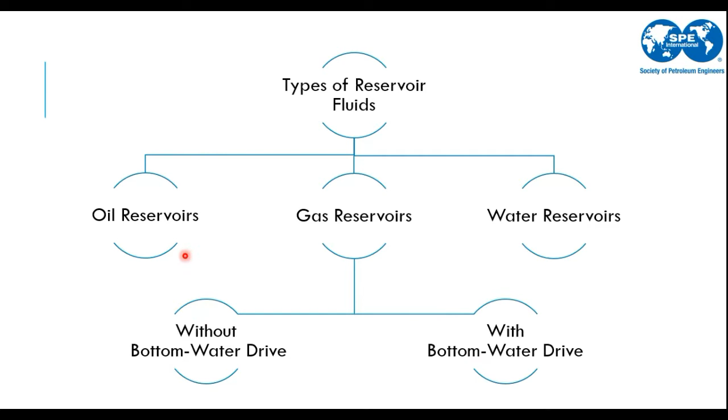The last thing that we will talk closely about is the oil reservoirs. The oil reservoirs are divided into two main categories: undersaturated and saturated oil reservoirs. The main difference is that undersaturated reservoirs are where the reservoir pressure is greater than the bubble point pressure. So you don't have any free gas in this formation. You only have gas dissolved in solution, and there are two types: with bottom water drive and without bottom water drive.

The second category is the saturated oil reservoirs, where the pressure is less than or equal to the bubble point pressure. So we will see some free gas, but if the free gas isn't enough to form a gas cap, this is called solution gas drive or depletion reservoirs. If the free gas is high enough to cause a gas cap, this is a gas cap drive reservoir.

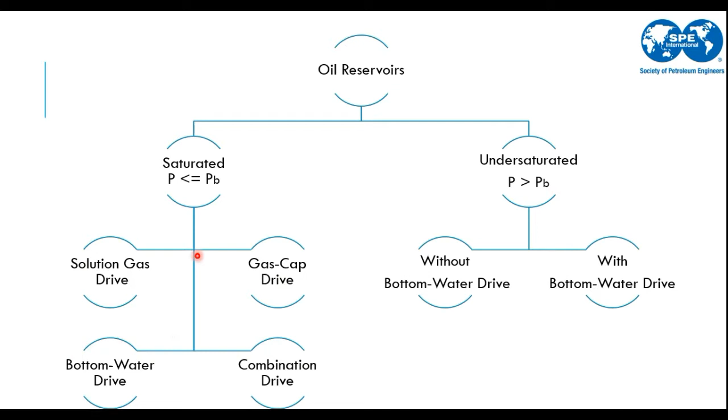If we have bottom water drive reservoirs, we will see some free gas, but the main driving mechanism here is the bottom water drive. And the combination drive reservoirs are where you find all of these things together: the free gas, the bottom water, everything about the saturated oil reservoirs.

So, there are three main methods to calculate the original hydrocarbon in place. HIIP is the abbreviation for hydrocarbon initially in place. We have the volumetric method, which we will talk about briefly. We have the material balance equation, which is our main concern during this webinar. And the last is decline curve analysis, but we won't talk about it very much.

The volumetric method: in order to calculate the hydrocarbon initially in place, you should have an isopach map where you know the area, and you know the thickness or the net thickness of the formations that you have, in order to calculate the hydrocarbon initially in place by using the volumetric method. This method is probably used by geologists or geophysicists in order to calculate this hydrocarbon in place. We have two equations here.

The first one is N equal 7758 multiply H, where H is the net thickness, as we said. A is the area of the reservoir in acres. Phi is the porosity; actually, it is the average porosity for all the reservoir. Multiply 1 minus the initial saturation, divided by Boi. It is the initial oil formation volume factor when we start producing from the reservoir, or before production.

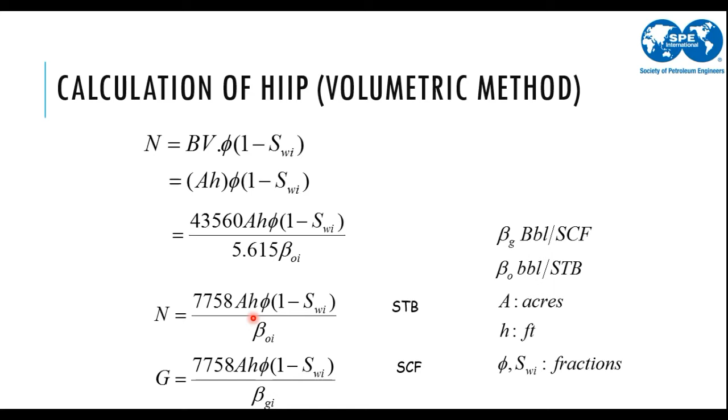the material balance equation is nearly the most accurate method to calculate the initial hydrocarbon in place. But why is that? Actually, because the material balance equation depends on the actual data or the production history that you have. It depends on the produced oil during the production of the well. It depends on the oil formation volume factor, gas formation volume factor, the Rs, the initial Rs, the Rp. All of these things are calculated in order to give you the most accurate approximation for the hydrocarbon initially in place.

Talking about the saturated reservoirs, I have given you the general formula for the combination reservoirs that we were talking about. The reason why I gave you the general formula of the combination only is that if you understand it very well, you would be able to calculate the depletion reservoirs, the gas cap reservoirs, the water drive mechanism reservoirs. All of these things could be manually calculated by using this general formula, and I will teach you how later on.

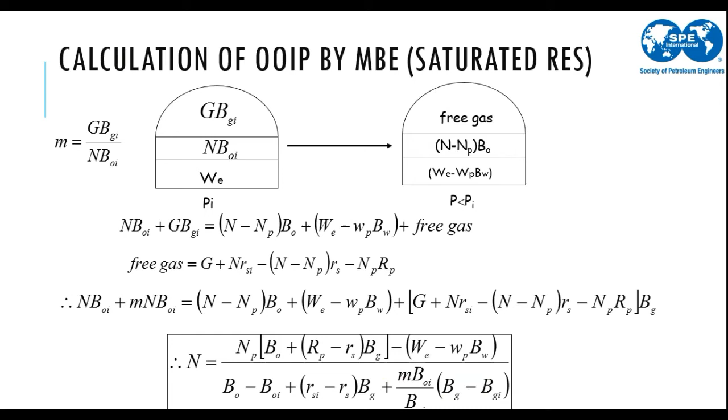Talking about the general combination equation for the saturated reservoir, all of these equations seem very confusing actually. This is the same equation, but we rearranged it in order to have a straight line equation. All of this term, NP beta O plus RP minus RS beta G plus WP beta W, we could substitute by F. Call this term F. Okay?

F is an abbreviation for flowing. So let the N, or the initial oil in place, remain as it is. We took the N as a common factor, okay? And this term we renamed EO, or the expansion of oil, and this term we would rename as EG. EG is the expansion of gas.

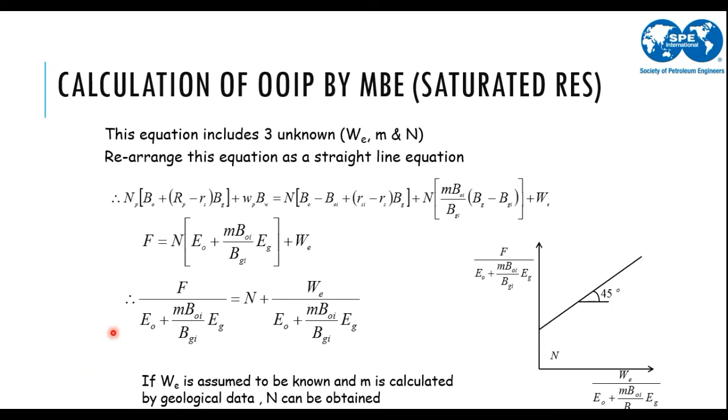So this is the saturated reservoirs. Talking about the undersaturated reservoirs, it is the same concept, but there is a little difference, because when the reservoir is undersaturated, or the reservoir pressure is greater than the bubble point pressure, we would take into account the CW and the CF. CW is the water compressibility, and CF is the formation compressibility.

Actually, there is another term called CO. CO is the oil compressibility, where it is equal to beta O minus beta OI over beta OI, or the initial oil formation volume factor, multiplied by delta P. And you should pay attention to this information.

In the CO equation, delta P is the current pressure minus PI, the initial pressure. Again, in the oil compressibility equation, delta P is the current pressure P minus P initial. But in the N equation here, delta P is P initial minus P, the current pressure. You know the difference? In CO, it is P minus P initial. In the N equation, or the original oil in place equation, it is PI, the initial pressure, minus P. Okay?

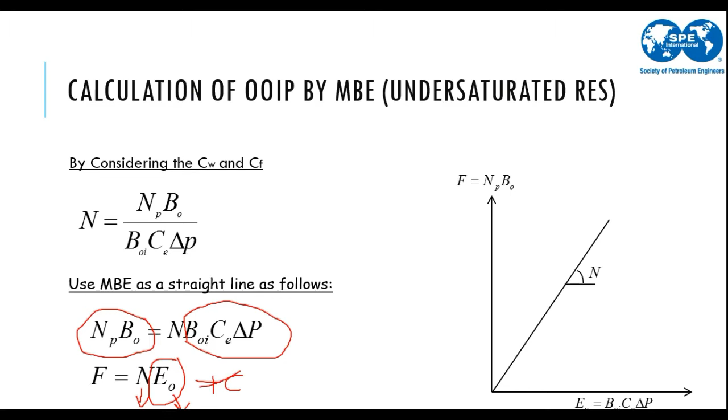Okay, welcome back again, and the first thing I would like to say is that I'm sorry for the mistakes that I made in the first presentation. The second thing is that this is where you will learn how to use the MBal software. MBal is a very user-friendly software that enables you to deal with very simple panels. You don't even need an instructor to teach you how to do it.

But anyway, if you open MBal software, you would have the tool panel with different options like material balance, reservoir allocation, Monte Carlo, decline curve analysis, and so on. We will talk about each one of them separately. The material balance tool is the main concern, where you would calculate the initial gas in place or the initial oil in place and predict the future performance if you want to do gas injection or water injection, and so on.

The reservoir allocation tool is a tool which improves the allocation by allowing the user to enter IPRs for each layer and calculate the allocations by taking the rate of depletion into account as well. Crossflow is also accounted for in this model, as well as different start or finish times for the well. Impurities are also tracked and can provide an effective measure of the quality of the underlying assumptions. This is in the case where few data are available.

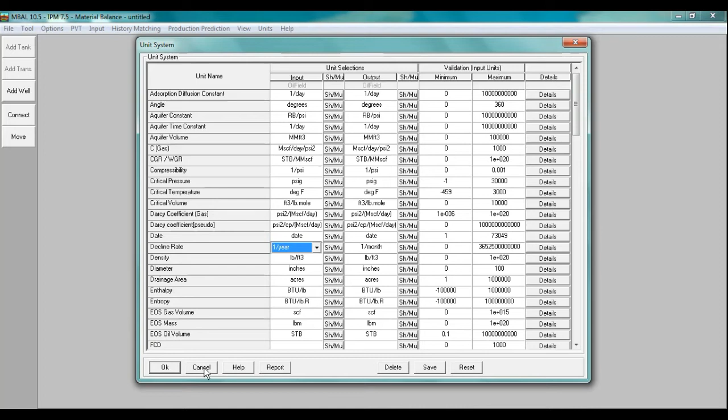Okay, as we said, MBal is a very friendly software. We could follow a sequence from left to right and from top to bottom in order to get what we want. The first thing that we will press is the options panel. It will get you the user information like the company, the fields, the location, and the platform if you are working on a platform, and the analyst with the reference time. Don't worry about it.

If you want to have any comments, like if you write SPE for example and you want to have a date stamp, you click here. It will give you the time and the date that SPE was written. Okay, it's very simple, and I guess for now it's useless.

Anyway, for the reservoir fluid we have 4 kinds of reservoir fluids: the oil reservoirs, the gas reservoirs. Actually, the gas reservoirs is named for the dry gas reservoirs. For the retrograde condensate reservoirs, MBal uses the retrograde condensate black oil model. These models take into account liquid dropout in the reservoir at different pressures and temperatures. So there is a difference between the gas and the retrograde condensate. So what is the general reservoir fluid?

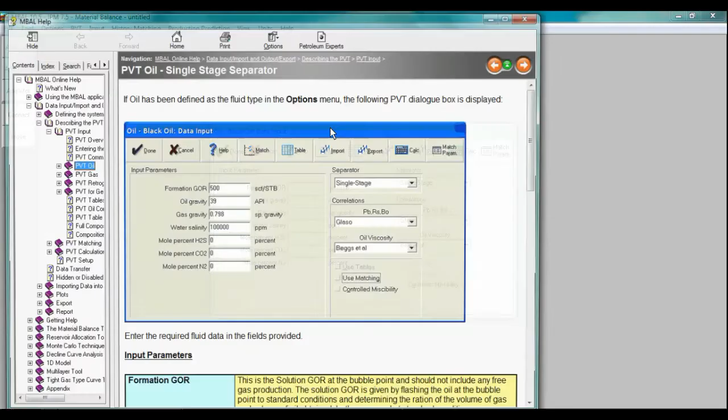For example, the formation gas oil ratio, if you read it on your own, you would think that it is the gas oil ratio that we know. Actually, it's not. It is the solution gas oil ratio, or the RS, at the bubble point pressure. It won't include any free gas production. The formation gas oil ratio here is the RS at the bubble point pressure. For example, let's enter the formation gas oil ratio as 500. This is an example actually.

The oil gravity, let's enter it as 39 API. I know it's a huge number, but it's okay. It's within the range. And the oil gravity here is at standard conditions. How did I know that? From the help button, as we said, the oil gravity is the gravity of the condensate at standard conditions. The gas gravity, let's enter it as specific gravity 0.798. The water salinity, let's say it's 100,000 ppm, parts per million. And let's assume that there is no H2S, no CO2, no N2.

After inputting the parameters, we want to match the data that we have from the production facility with the data obtained from the PVT laboratories. How could we match both of them? We have the match button here. Please click on it. It will give you maybe 20 or less tables for the PVT data obtained from the laboratory.

Let's say that the temperature of the reservoir is 200 degrees Fahrenheit, and the bubble point pressure is 2200 psig. Let's enter the pressure as we said, 2200 psig. The gas oil ratio here is again the RS, the solution gas oil ratio. Let's enter it as 500. Oil formation volume factor 1.32. Oil viscosity is 0.4. Of course, if you have all the data from the PVT laboratories, you would enter it here.

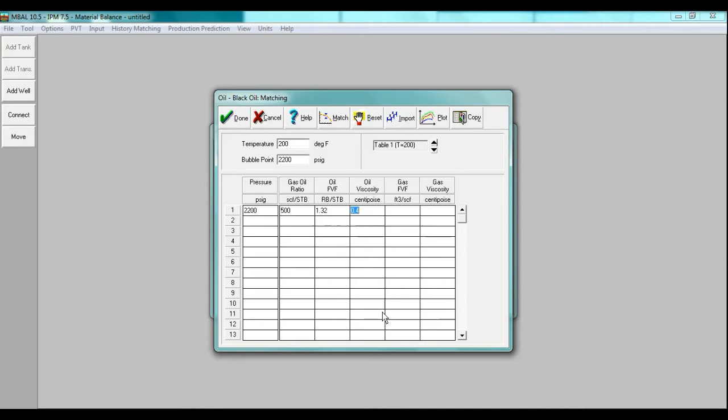Once you click match, you have several options: the bubble point, the gas-oil ratio, the oil formation volume factor, and the oil viscosity. You only have to take the things that you are pretty sure of. In most cases, we choose bubble point pressure only because we are pretty sure of it. But we will give it a try and choose all of these during this session. Once you have taken the things you are sure of, click on match all, and then click on calculate. Once you click calculate, you should choose match parameters.

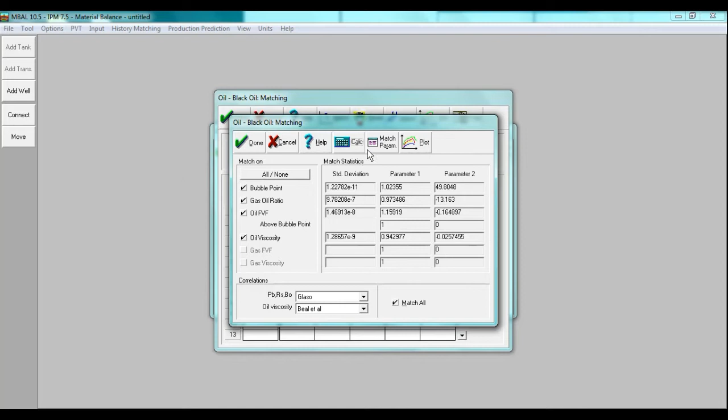What is this? In the match parameters panel, you have the bubble point pressure, the RS, and the Bo. Each one has the most used correlations: Glaso, Standing, Lasater, Vazquez-Beggs, Petrosky, and Al-Marhoun. We should pay attention to the standard deviation in each one. For example, in the bubble point, the standard deviation is 1.2 × 10^-11. Here is 4.36 × 10^-11. Here is 8. Here is 1. Here is 1.59. Here is 9.09 × 10^-12.

So what is the least standard deviation among all of these correlations? Actually, it is Al-Marhoun. So Al-Marhoun is nearly the best match for calculating the bubble point pressure from the actual data that we already had.

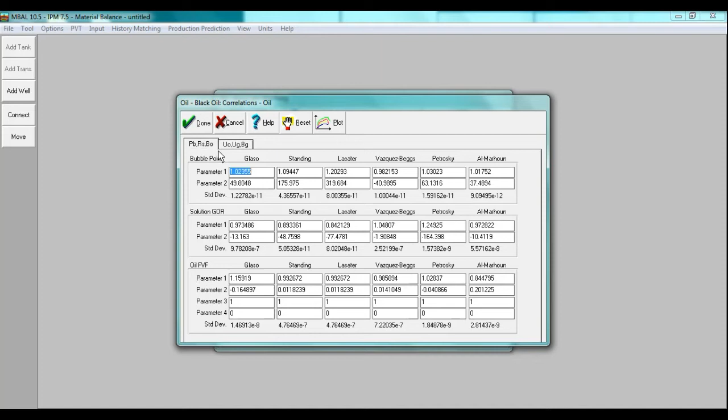Once we have decided which equation we would choose, we press on done, and then done, again done. You will see that the use matching will appear and disappear. This means that you already matched the data you have, and we will choose Standing here as we said for Pb, Rs, Bo, and we will select Beggs et al. for oil viscosity, and then we click on done.

Great. Once we have finished the PVT data, there is also a tool for PVT if you want to calculate the PVT data. This is only for trial. If you have a temperature, say from 150 degrees Fahrenheit to 200 degrees Fahrenheit, and you want 10 steps between 150 and 200, you'll have each 5 degree increase in temperature. Also the pressures from 2500 to 3500, and the steps is 10, and you click calculate.

It will give you approximated PVT properties for all the properties you would ask, using the data you have already entered, from 150 temperature, 155, 160, 165, and so on. Okay, it's not very important, but if you want to automatically calculate the PVT data using the correlations that you define, it's not very hard. So anyway,

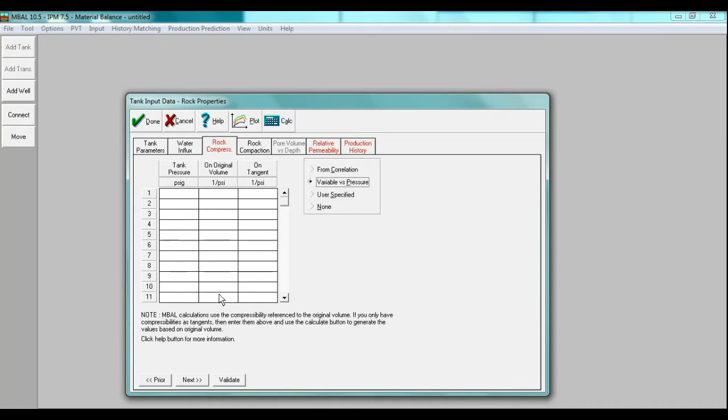The rock compressibility, we have several options for the rock compressibility. The first is that the rock compressibility is calculated from the correlation within the software. It will calculate it automatically. Second, you have a variable rock compressibility versus pressure, and these are from the core analysis data. You may have this information, so you would enter it. You may use user specified rock compressibility, let's say 3.5 multiplied by 10 power -6 or whatever, and you can ignore the rock compressibility.

But I don't like to ignore the rock compressibility, because in undersaturated reservoirs specifically, it is very important to know the rock compressibility, because this is the main driving mechanism in undersaturated reservoirs. So you can't just ignore it. We will select that the software will calculate it from the correlation.

Okay, once we choose rock compaction. By the way, if you have the panels that have the red font, this means that you haven't filled in this panel yet. You need to fill the relative permeability, and you need to fill the production history.

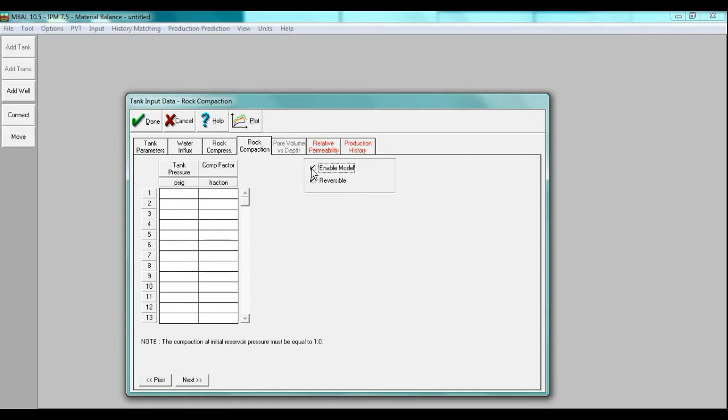Anyway, at the rock compaction, if you have the rock compaction details, tank pressure versus the compaction factor, you just have to enable the model and enter it. The compaction at the initial reservoir pressure must be equal to 1, as mentioned, and then it decreases. Anyway, we don't have information about rock compaction, so we won't enable the model. Pore volume versus depth is only available when you select the monitor contacts, as we saw before.

The relative permeability data, you could either enter the relative permeability data by Corey functions or by tables: water saturation versus relative water permeability, oil saturation versus relative oil permeability, and gas saturation versus relative gas permeability. But the data we have here is a Corey function.

Please enter these values for the example that we have: 0.15, 0.8, 0.903054, KRO 0.15, 0.730376, 1.63454, KRG 0.02 for the residual saturation, endpoint is 0.9, and the exponent is 1.

Some of you would ask me, why did I enter the KRG while I don't know if there is gas or not? Let's say that this is the default value. You may get it right or wrong. It doesn't matter as long as you didn't find out yet whether there is a gas cap or not.

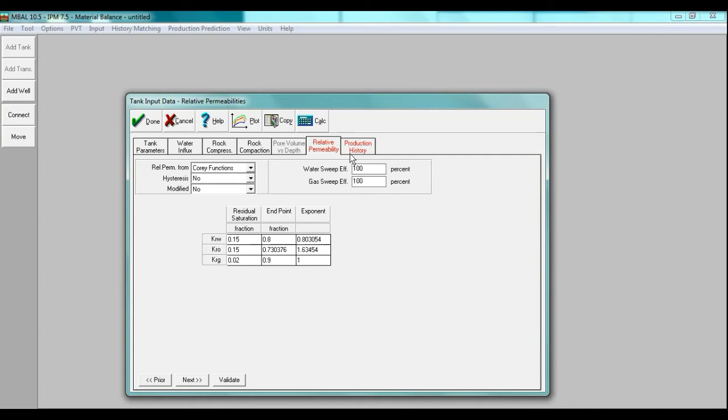However, if hysteresis is activated, as before, when the saturation starts to rise, it follows the normal curve from SR to S max. Now, if the saturation drops from S max, it will follow a different path. The curve will go to another value rather than the SR or the SR max. Okay. Anyway, it's not very important to do it, but this is what hysteresis says.

Okay. The last thing is the production history that we have. Actually, there is a lot of data to know about it. We have the time, the reservoir pressure, NP or cumulative oil produced, cumulative gas produced GP, cumulative water produced WP, cumulative gas injection if you have a water injection or gas injection.

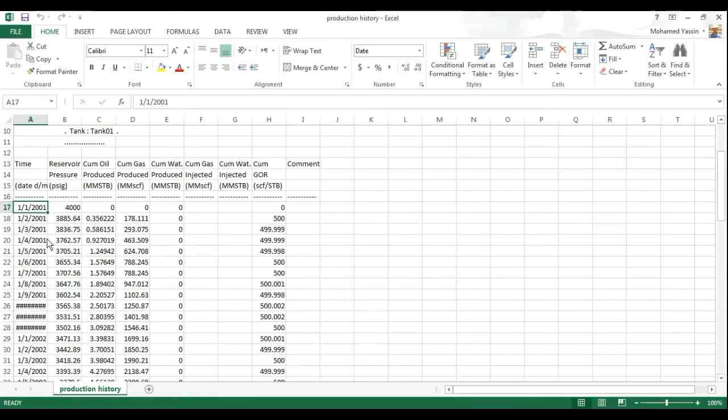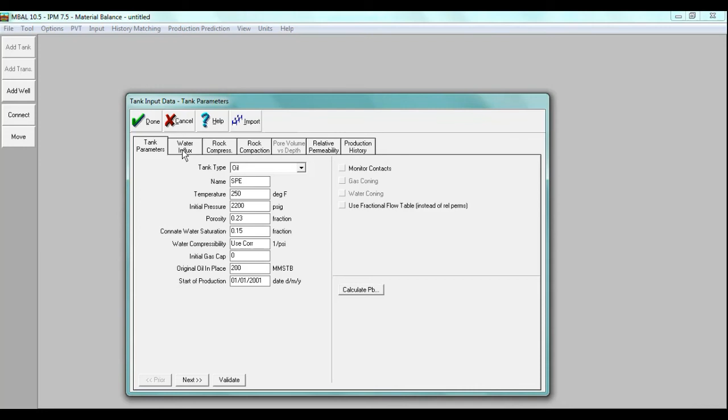We will have all of these results, and we'll copy and then paste the table. Okay, and let's change the start production to 1/1/2001 rather than 2017. Okay, once we have filled all of these panels, we click on done. What is next?

Once we have finished the input of the tank data, I just forgot something. In the tank data, the initial reservoir pressure is 4,000, not 2,200. 2,200 is the bubble point pressure. Okay, and let me comment on something here. If you have an undersaturated reservoir, it's fine to enter the initial pressure itself.

If you have a saturated reservoir and the bubble point, let's say in this example, is 2,200, and now we are at a pressure of 2,000 only, should we write 2,200 as the initial pressure, or 2,000? We will use 2,200 as the initial pressure if this reservoir is saturated. In the case of a saturated reservoir, the bubble point pressure is written as the initial pressure. But here it is an undersaturated reservoir, so the initial pressure is 4,000. Okay, so please change it.

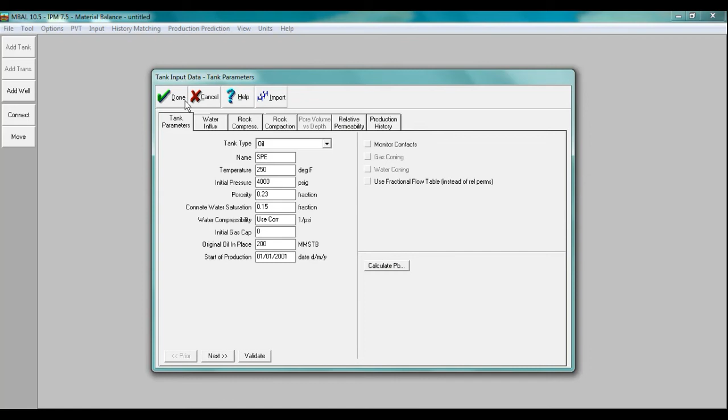Once we have finished all of this data in tank data, we click on history matching, where you know whether the reservoir has a water drive mechanism, a gas cap, is undersaturated or saturated, what the initial oil in place is, and all of this information is only known from the history matching panel.

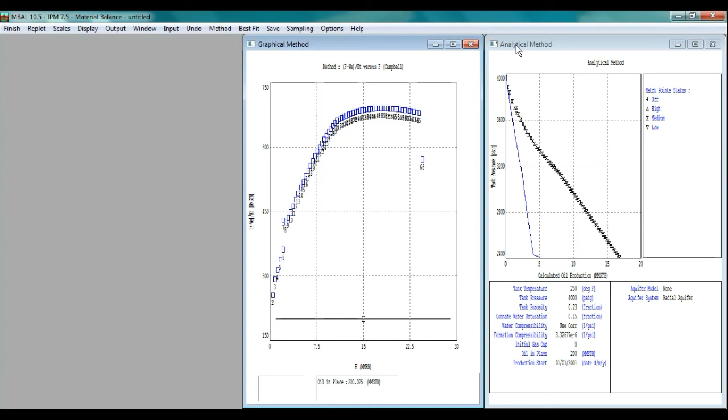Okay, the graphical method is the old method of F, We and all of these things that we talked about during the presentation, but this is not of interest. What is of interest is the analytical method. This blue line represents the model that you are using, and these X's represent the production history data that you have.

In order to know that the model you have used is the same as the production history data, they should match, should coincide on each other. Okay, how to do it? The model without water appears as a red line, while the model with water drive mechanism appears as a blue line, as we will see afterwards. So if we have a variation or a gap, we press on regression.

What is regression? Regression means that you are not sure of some parameters, like for example the oil in place. We have set it at 200 MMSTB, right? And we are not sure of it because we don't know. In the regression phase, when we press calculate, the program calculates the oil in place, or all the parameters that you have checked, in order to give you the nearest match between the blue line and the actual line.

This nearest match is not necessarily the right model. But if you choose accept all fits and then press done, accept all fits means that you will use the values of the best fit, and you said done.

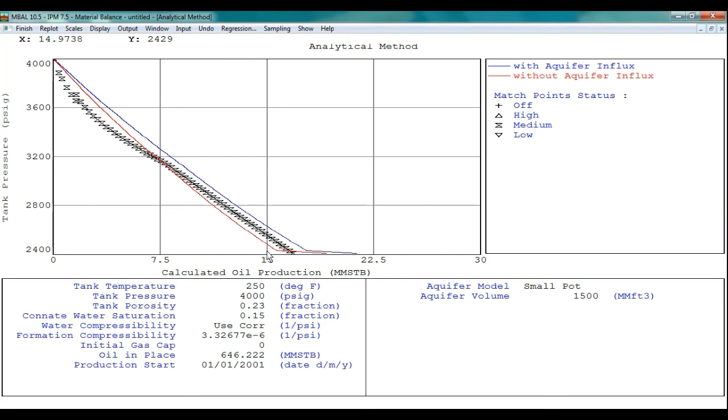So we should make some regression in order to have the blue line coincide on the actual data that we have. If we press on the regression, we don't know the oil in place, we don't know the aquifer volume, but we are somehow certain of the porosity, because porosity is being measured at the lab. So we won't click on porosity, and we will press calculate, accept all fits to use the data that have been calculated, and then done.

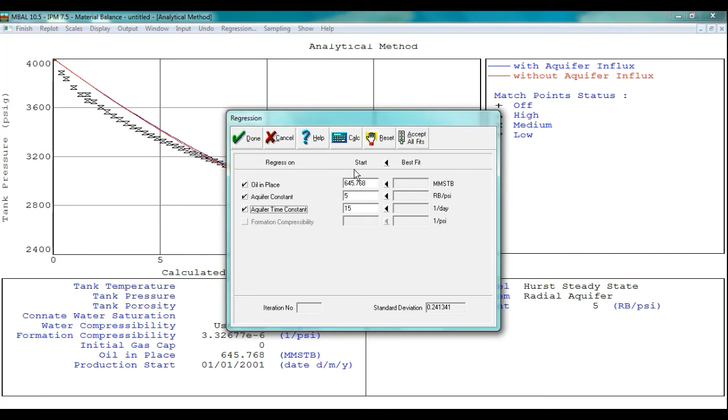We will see that the red line and the blue line coincide with each other, but not with the production data itself. So we will keep changing again. Say Hurst steady state, aquifer constant, let's say it's 5 reservoir barrels per psi, and time constant is 15 days, and then done. Then we will make regression again on the oil in place, we're not sure about it, aquifer constant, aquifer time constant, and then press calculate, accept all fits, and then done.

We will have the blue line here matching only at this portion, but it doesn't match here or here or there. It doesn't necessarily have a perfect match on all the production data, but at least not that bad. Okay, so we will see another water influx model.

If you tried at home all of these models, let's say Hurst van Everdingen Dake, the system will give you a radial aquifer, linear, or bottom. If we choose linear aquifer, it will give you constant pressure or sealed boundary or infinite acting. Let's say we have a sealed boundary. The reservoir thickness is 40 from the logging data. The reservoir width is 250 feet. Aquifer volume say 2000, and the aquifer permeability, let's say 5 millidarcy. Okay, and then done.

We have a regression on oil in place, aquifer volume, aquifer width, reservoir thickness. We won't click on it because you are supposed to have the reservoir thickness from the logging, and it is somehow accurate. The same for the porosity, but the aquifer permeability is not accurate, so we will calculate it. Accept all fits, done. We still don't have a match.

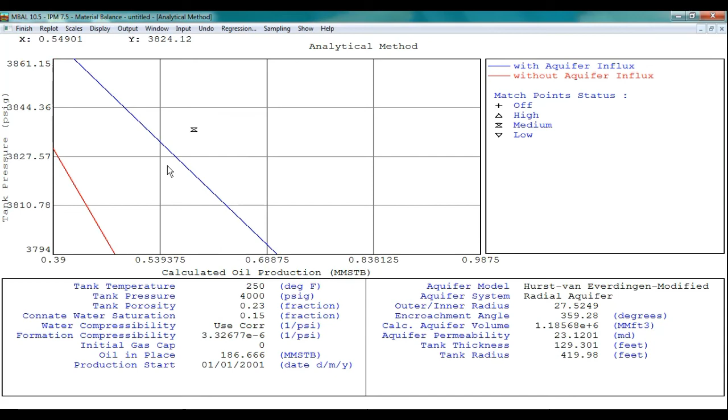You will have a nearly perfect match here. You see? All the way you nearly have a perfect match. But does that mean that the model that you are using is the right model? No, it isn't necessarily the right model. Why?

Let's look at the calculated oil production data here. You have the tank pressure, the porosity, the connate water, and so on. The aquifer model you are using, the outer and the inner radius 27.5, this is a reasonable value. The encroachment angle is nearly 360, a reasonable value. The calculated aquifer volume is 1 multiplied by 10 power 6 MMft³. This is a reasonable value.

And so for the aquifer permeability, 23 millidarcy, tank thickness 129 feet, and the tank radius 420. These are reasonable values for the aquifer. But let's say that we have used another model and it gives you a perfect match just like this, but if you have ticked on the porosity, the porosity is 0.0032. Is this a reasonable value?

No, it is not. You should not only depend on the matching between the aquifer influx model and the production history. You should count on the matching besides the data that you have. Anyway, we will suppose that this is the right model that we are going to use. How can we make sure that this is the right model? Let's press on finish.

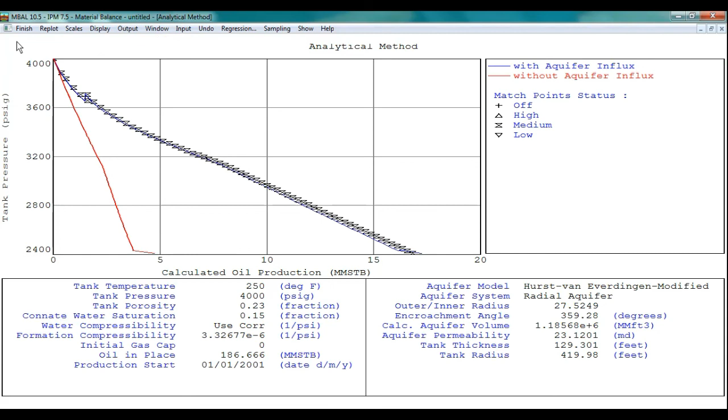Come again to history matching, and then we run a simulation in order to know if this model is right or wrong. We press calculate. This is the calculation of the simulation according to the model that you have entered. And then you press done. Why did we do this? I will tell you later why.

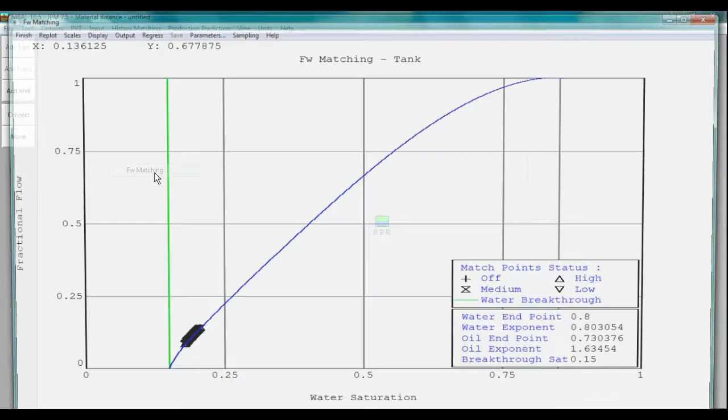After the history matching, you will press on the FW matching and FG matching. It is the fractional water flow and the fractional gas flow. This is useful only if you have water injection, or to know the water breakthrough and the gas injection and the gas breakthrough and so on. You can press also regression on default variables. It won't give you an accurate result because we have so little data about it. It is supposed to have the S-shaped curve, as you all know. So it doesn't matter now because we won't have a water injection case in this case.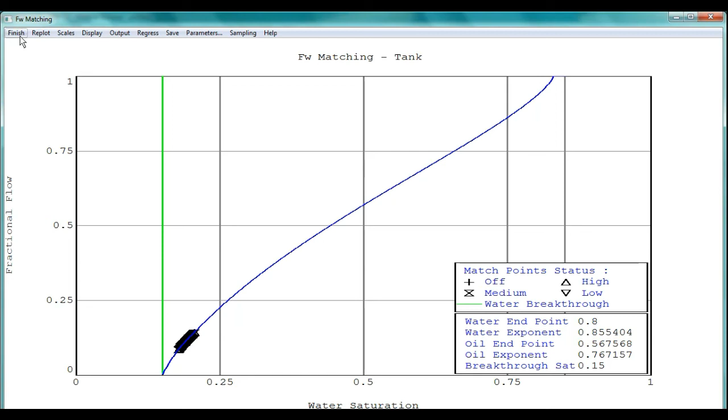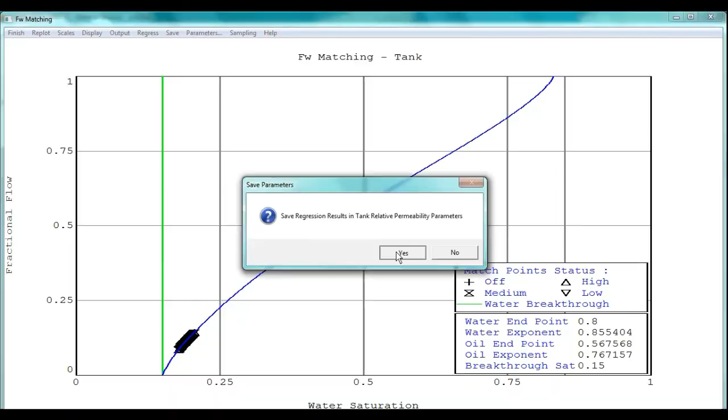Just finish. If you want to save the regression, say yes. If you don't, say no. Anyway, the production prediction is the last thing that you would need to know after the history matching. You should pay attention that after the history matching, we know that the reservoir has a water influx and oil, right? As I told you at the beginning of the video, the oil is represented by the green color, and the water is represented by the blue color.

At the production prediction we press on the prediction setup. You have three options to predict. Either to predict the profile from the production schedule, no wells, or the tank. This is when you have data from the tank only, or the reservoir only, not from wells. Second is that you predict the production profile using the well models, if you have the well models and the IPR and the VLP and so on.

Or if you want to calculate the number of wells to achieve a certain target rate. Let's say that you have 5 wells producing Q equal to 500 barrels per day, okay? And you want to increase this target to 700. MBal has the ability to calculate the number of wells to achieve this target. Anyway, we will choose here predict profile from production schedule, no wells.

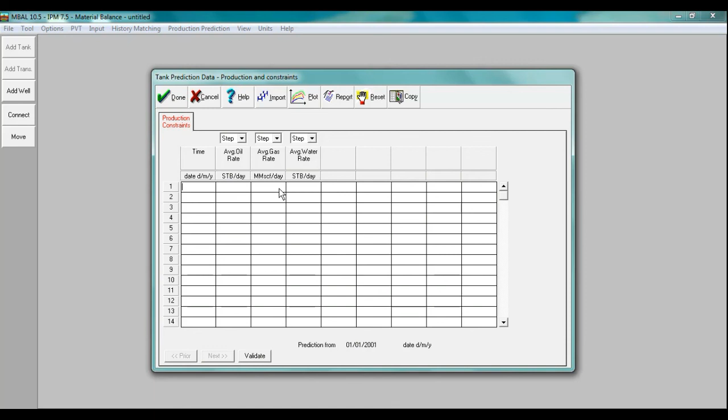Then press production prediction again, and then production and constraints. Production and constraints means that if you have the actual data of the production and prediction, it's okay to use it, of course. The time, the average oil rate, the average gas, and so on. If you don't, you can copy it from the simulation data that you have already done.

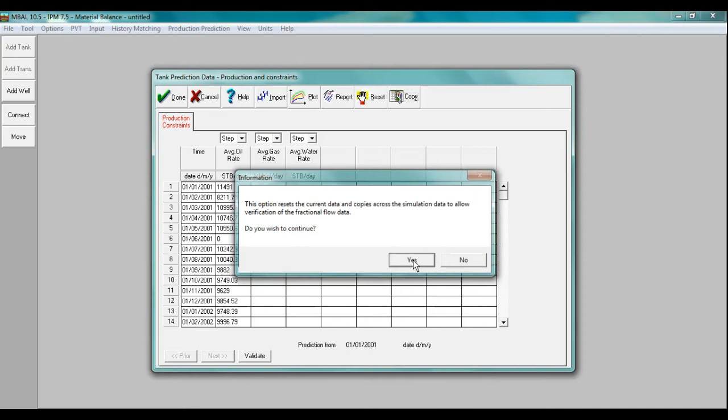He will tell you that this option resets the current data and copies across the simulation data. It will take the average oil from the simulation data according to your model, and we will say yes, okay, and then done. The last thing is the reporting schedule.

Do you want the reporting schedule every month, every year, every 2 months, every 2 years? Say we want it every 6 months. You will write down 6 and choose months, okay, and then done. Then you run the prediction. Press calculate.

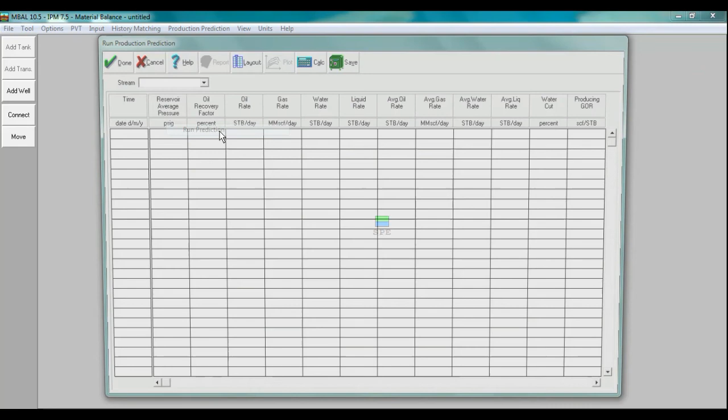It gave you the calculation until the 1st of July 2006. Why is that? Because we said that the production prediction will start from the start of production and end at the end of production, right? If you click on the plot, you will see the time versus tank pressure, but we want to know all of the data, the tank pressure versus time and the cumulative oil versus time also.

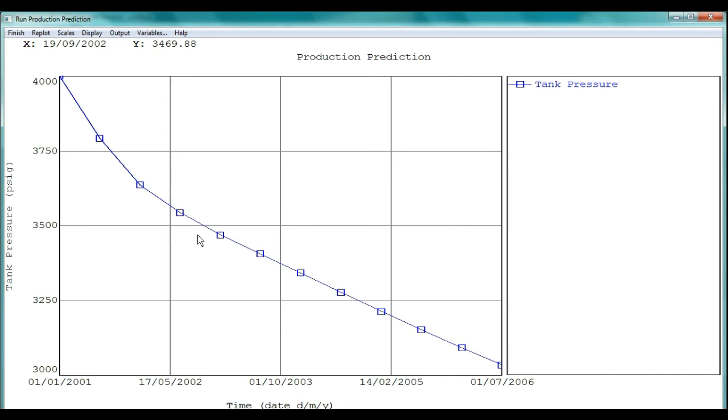This is for the simulation data, this is for the prediction data, and this is for the production or the actual field data. From variables, we will select the prediction, the simulation, and the history. Okay, this software gives you the flexibility to choose 2 things, not only one: tank pressure, and the second is the cumulative oil production versus time. If you want to change this, you may click on tank pressure and solution gas oil ratio and so on, okay, and then press done.

If you look here, you will find a perfect match between the history and simulation and prediction for cumulative oil. All 3 lines coincide with each other. But if you look at the tank pressure, you will see that the history and simulation data coincide with each other, or give good results at least, but the prediction is away from them.

This huge difference between them means that if you use the model that we were talking about, you would probably have wrong results for the actual data. If you predict the future data, say from 2006 to 2012, you will have other results, and you will get lost and confused. So this means that the model that we have used is terribly wrong. Okay, we press done.

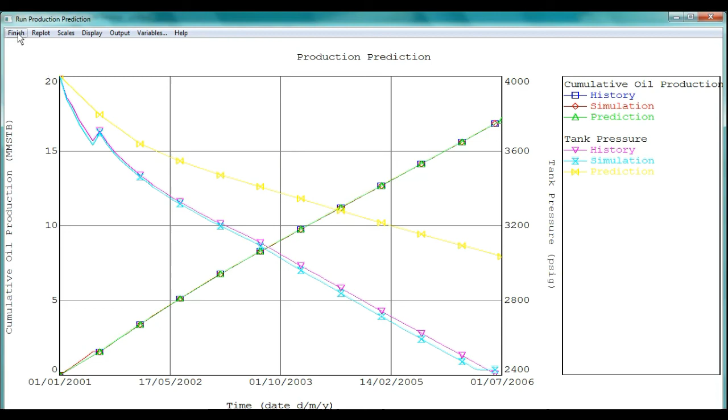We may change the production and constraints to these values, and I will provide you with a file of these values. These values are the actual data that we had from the field, and then we press done. If you copied these values from the simulation model, you would probably have a different prediction model and you will get lost. But if you enter the actual field data of the average oil rate, the maximum liquid rate and the maximum water rate, you would find the perfect match. Once you enter this data that I will provide you with, select done.

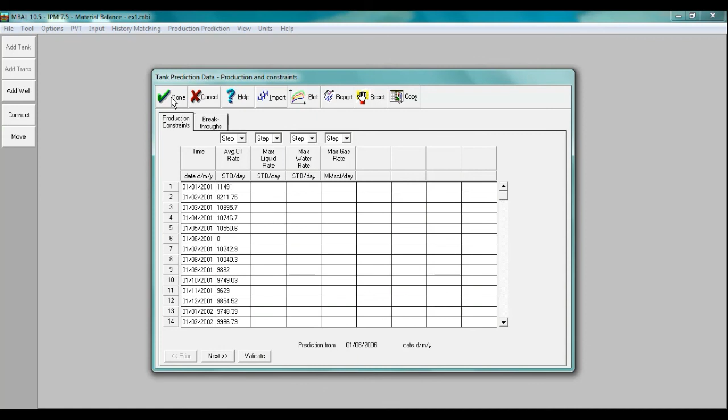It's okay, and then run prediction, and then calculate again using the prediction, until it said that the pressure has dropped to 0. It's okay. We are fine with that. Once you plot the data, you would see the cumulative oil production here. I'm sorry. The history and simulation lines coincide with each other besides the prediction, as we saw before.

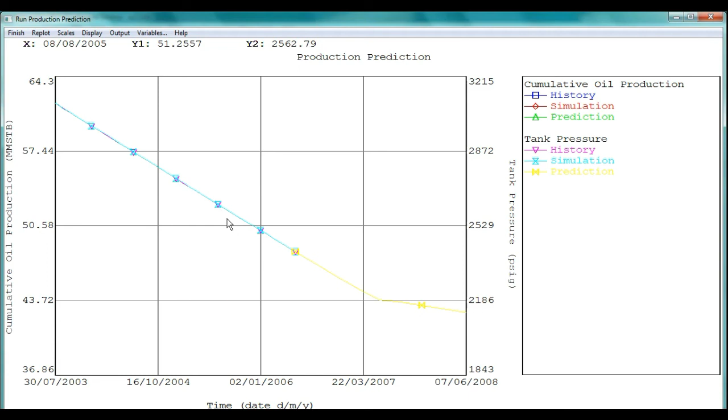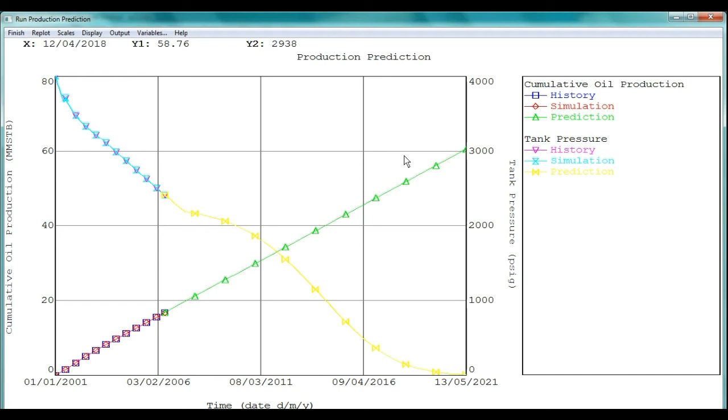But at the tank pressure, the tank pressure history, the tank pressure simulation, and the tank pressure from the prediction all coincide with each other. So this is a perfect match, and this will give you the desired prediction that you always seek. Okay.

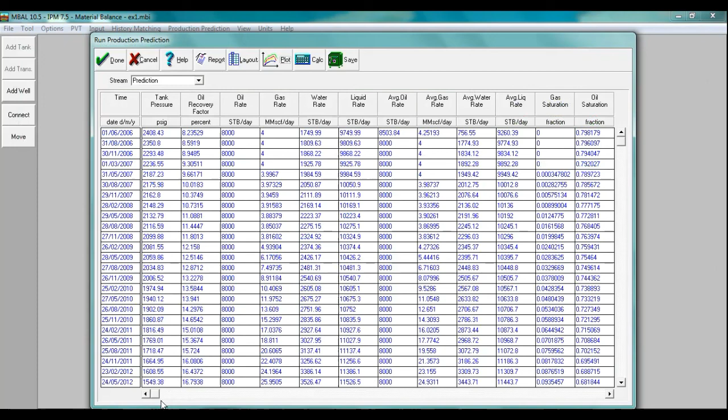The last thing that I will say during this session: if you want to give a report, if you have all of this data, the oil formation volume factors, the PVT, all of these things, and you want to save them, what can you do? You choose report, then report to a file, then report again, and you write down the name of the file you want, like SPE. It will be saved as text. Okay, and then you press done, and that's it.

So unfortunately, this is the end of our session, guys. I hope you liked it, and I hope that I have provided you with all the information you need to use MBal software.